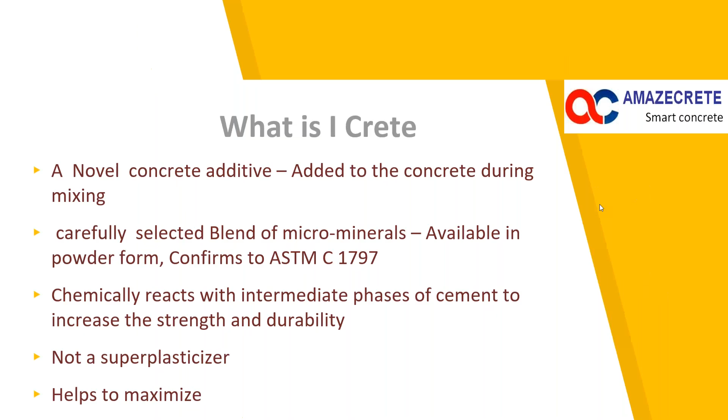iCrete is a novel additive which is added during concrete mixing. It is available in powder form. It is a carefully selected blend of microminerals, and it conforms to ASTM C1797. The product reacts with intermediate phases of cement to increase strength and durability, and it is a completely different product. It is not a super plasticizer, and it helps to increase the profitability and durability, and also helps to increase the use of supplementary cementitious materials. We'll come to that one later. Next slide.

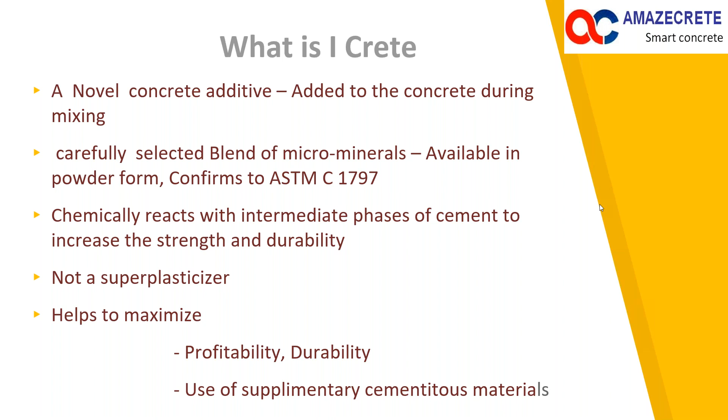So as we just talked about why we should use iCrete. iCrete brings great leverage for the concrete producer. He can optimize the mix by lowering the cement content, or he can increase the SCM loading.

For example, if we have OPC mixes, let's say a mix of OPC 400 kgs or 450 kgs at a particular dosage like 1.5 or 1.8 or 2%, we can reduce about 50 to 55 kgs per cubic meter. On the lower end of the dosage, if we have 0.8 or 0.7% dosage, we can reduce about 20 kgs per cubic meter. So the range is between 20 to 50 kgs, directly from OPC to OPC.

On the other hand, we can also reduce the cementitious content itself. For example, with an OPC plus GGBS mix, let's say 450 kgs total, we can reduce the total cementitious content from 450 to 400 kgs or 390 kgs. Sometimes we have got results of 75 kgs OPC plus GGBS total cementitious content reduced. Similarly, with an OPC PFA mix, say 400 kgs total, you can reduce the total cementitious content, or we can increase the SCM loading.

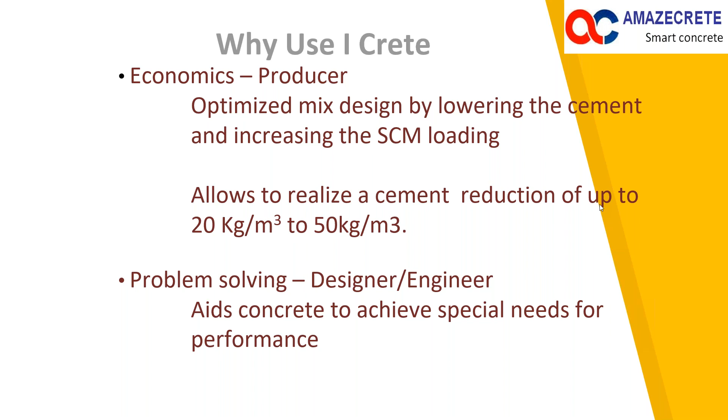So why we should use iCrete? The important point is durability to the owner. Even though the main purpose of this product is to optimize the mixes, which is very interesting and useful to any concrete producer, the beauty of the product, and why we call it a novel additive again and again, is that it not only reduces the cement content, cementitious content, or enhances SCM loading, but at the same time the durability is enhanced.

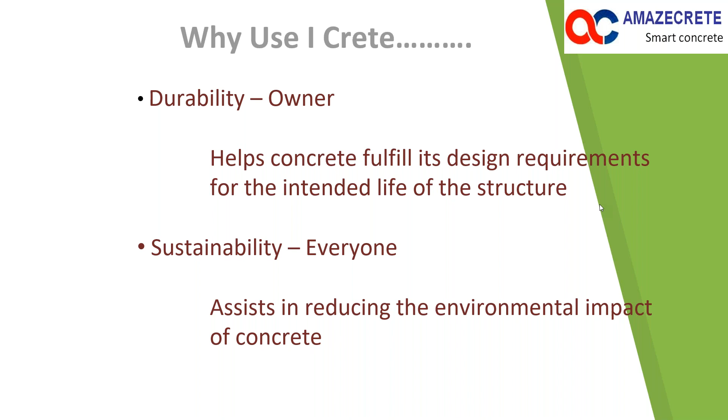And of course, when the cementitious content or OPC content goes down, the sustainability becomes better, the product becomes greener, and the environmental impact reduces. In that way, even the total carbon dioxide emissions, or the embedded carbon dioxide, and the other associated environmental factors are improved.

So when we talk about this product, the most interesting and important question everybody asks is how iCrete actually works. As I said, I'm like a student explaining in front of the teacher - I'm explaining this in front of Dr. Ramkumar.

Here's the point: it promotes dissolution of alumina and iron present in the supplementary cementitious materials and cement. We know that alumina and iron components are present in cement and cementitious systems, and iCrete works on these materials, accelerating the hydration of intermediate phases and increasing the rate of silicate reaction. Most importantly, it forms additional binding phases other than the calcium silicate hydrate gel normally formed in any cement hydration process. So it forms additional products other than calcium silicate hydrate gel, and that is how it works on a different level - that is why we call this a totally different technology.

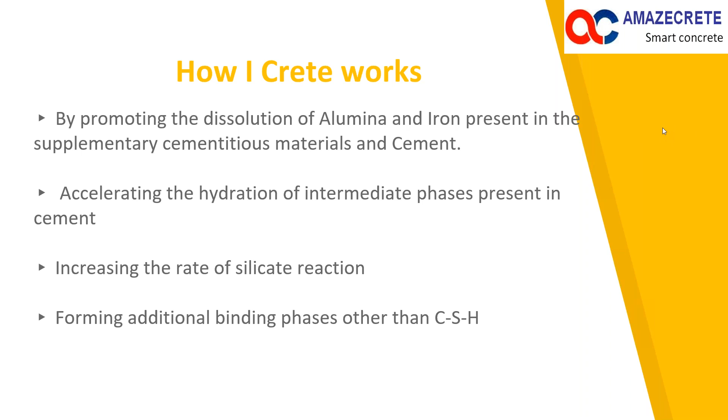So with iCrete, when additional binding phases are formed, it fills up the capillary pores and the pore size is reduced. That is the important work of iCrete. In combination with the alumina and iron present, it forms new binding phases other than calcium silicate hydrate gel and fills up the capillary pores, hence making the concrete denser, impermeable, and stronger.

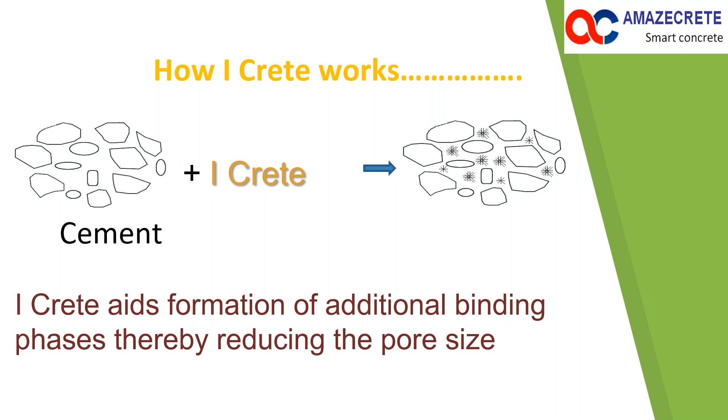Next. Next. So, madam, previous one.

So what is the difference between iCrete and superplasticizer? Any superplasticizer, we know, is based on SNF or PC based admixture. It does not react chemically with cement. It acts as a surfactant, increasing the distance between cement particles. It increases the flow or reduces the water content.

Whereas iCrete chemically reacts with the concrete, lowers the permeability of concrete, reduces the cement content, and increases SCM usage. Most importantly, there is no effect on the workability or rheology.

So whenever a pumpable mix or a concrete mix is produced using a superplasticizer, the workability and retention part, whether 1 hour, 2 hours, 3 hours, remains intact. ICrete doesn't interfere with the normal retention which happens with a superplasticizer or a superplasticizer-cum-retarder, and it also does not modify any rheological property.

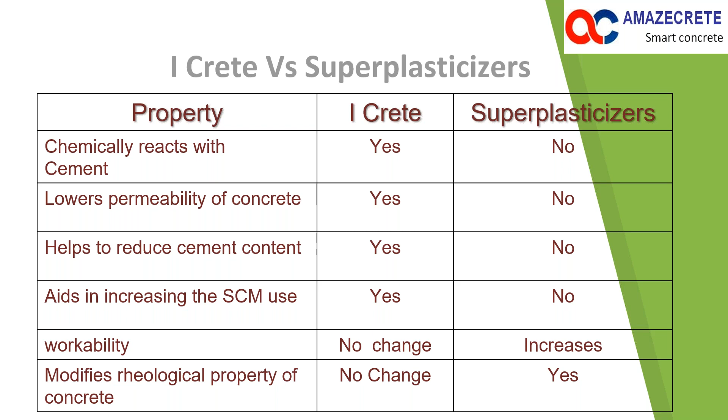That is one of the added advantages of using iCrete - it does not affect the workability in any way, keeps the workability intact, and in the same way you get better strength and better properties.

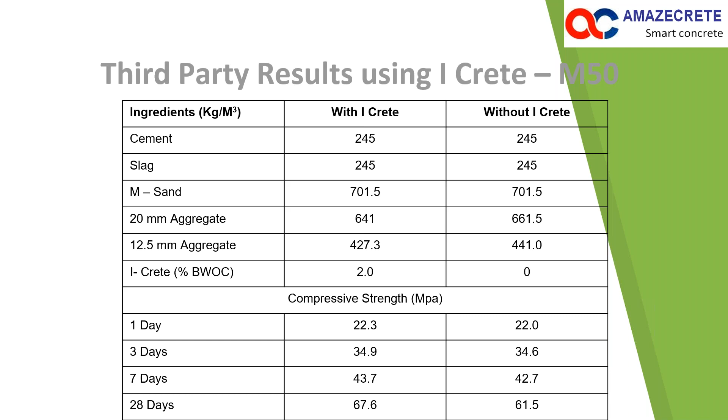Here again is a classical example where the permeability is reduced in a very big way by usage of iCrete. At the same mix, when 2% of iCrete is used, the percolation of water as measured per DIN 1048 has reduced from 13 mm to 4 mm, which is a tremendous reduction in permeability, leading to increased durability.

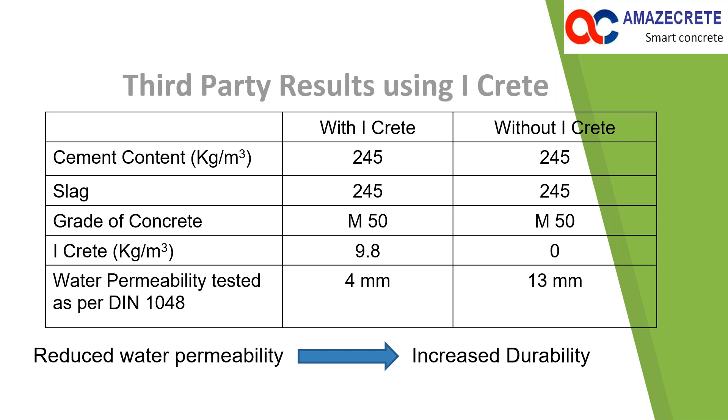So as per IS 2645, when the product is tested without iCrete, the percolation is 100% as measured. With iCrete, it is only 18% against the control when 2% by weight of cementitious content is used. So again, this shows the permeability is reduced in a very significant way.

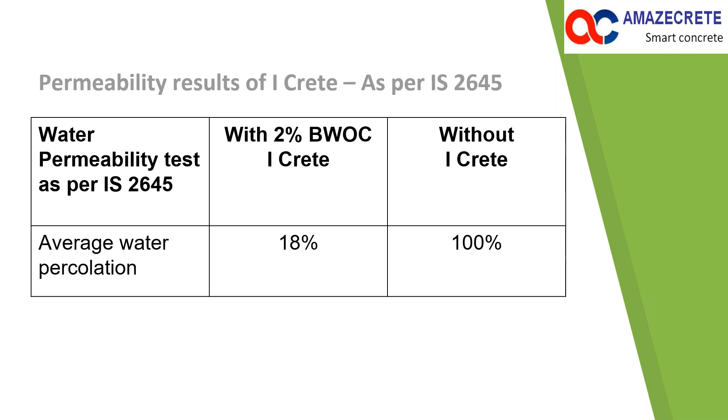Next one. So we talked about OPC GGBS mixes. Now this also works in a good way with fly ash mixes. Here we can see that when 220 kg OPC plus 100 kg fly ash is used, against that, when 0.7% iCrete is used with about 300 kg, the strengths are almost similar, 37.05 and 36.7.

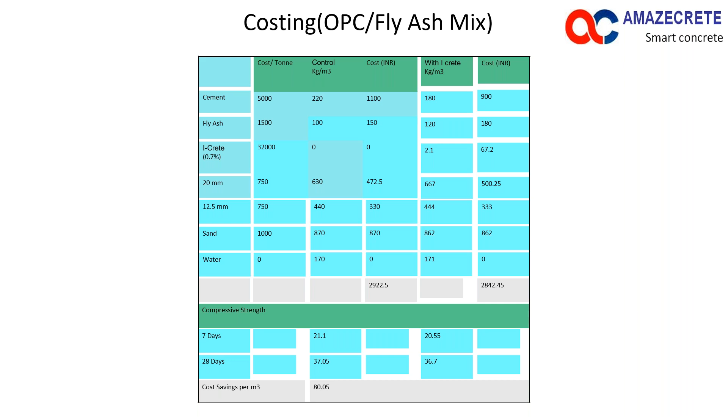So when we are talking about iCrete permeability test as per IS 2645, average percolation of water when 2% is used, it comes down to 18%, and without iCrete it becomes 100%. So there is a tremendous reduction in the permeability.

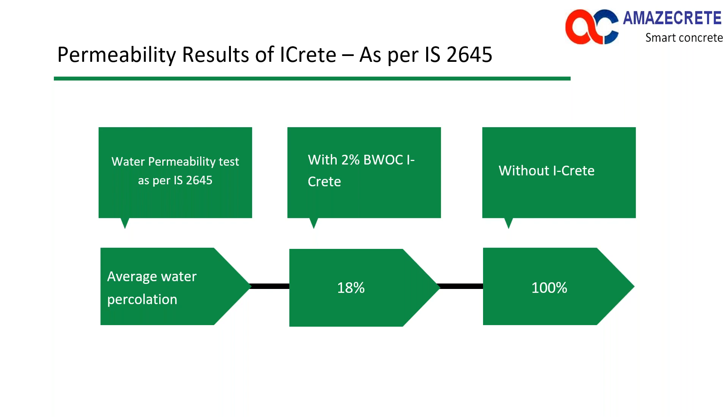As a summary, I can say iCrete is a novel additive which can be used to optimize the mixes. We can reduce OPC by 20 to 50 kgs per cubic meter, or sometimes even higher. We can reduce from an OPC GGBS mix to another OPC GGBS mix, reducing the cementitious content itself, whether it is OPC GGBS or OPC PFA, or we can keep the same cementitious content and increase the SCM content, increasing the GGBS content or the fly ash content.

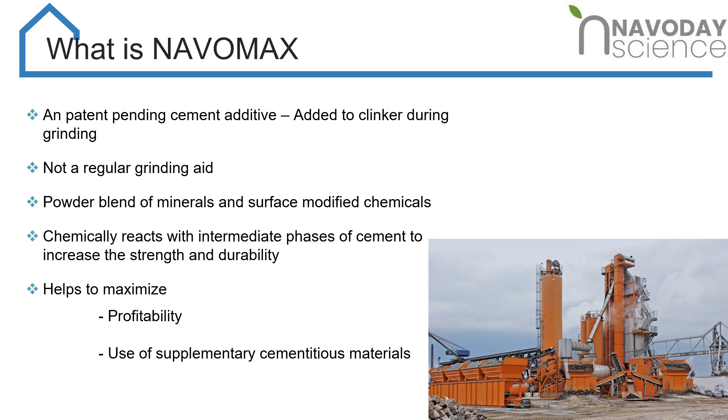So once again, as I told you, it's a powder-based additive. It reacts with the intermediate phases of the cement to increase the early strength and later strength. And I'll explain why, I mean what happens when you increase the SCM in your cement or concrete.

So all these supplementary cementitious materials, which are basically slag or fly ash, contain to the extent of 8 to 30% alumina. So when water is added to this system, because of the increase in pH, alumina dissolves and gets converted into aluminum hydroxide gels. And these aluminum hydroxide gels will start coating the silicate grains present in the cement, thereby not allowing the silicate to further react.

And this is one of the main reasons why you get decreased early strength when you increase your SCM content. Even though these aluminum hydroxides are metastable and over a period of time will go away, until that time it coats the silicate grains and doesn't allow the silicate to further react.

And what we have done here is we have added certain chemicals that will preferentially hold on to this alumina to get converted into aluminum hydroxide. The process is called chelation. Chelation preferentially holds on to the alumina by forming certain bonds, and it also supplies certain counter-reactive anions that will react with the alumina.

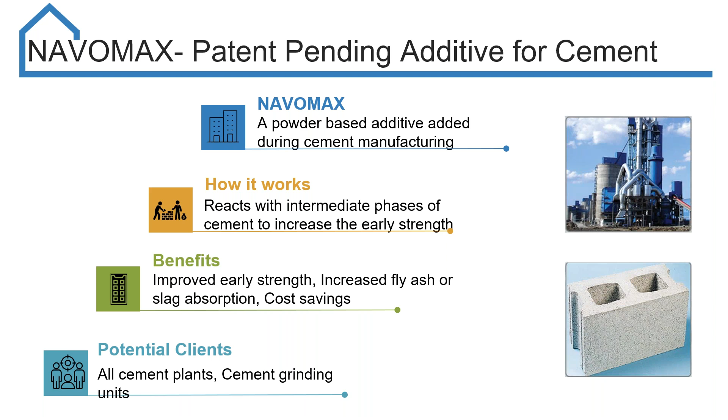So this is the principle which is very common with both iCrete and Navomax. The space between the CSH grains are filled with the reaction product of Navomax or iCrete in terms of concrete.

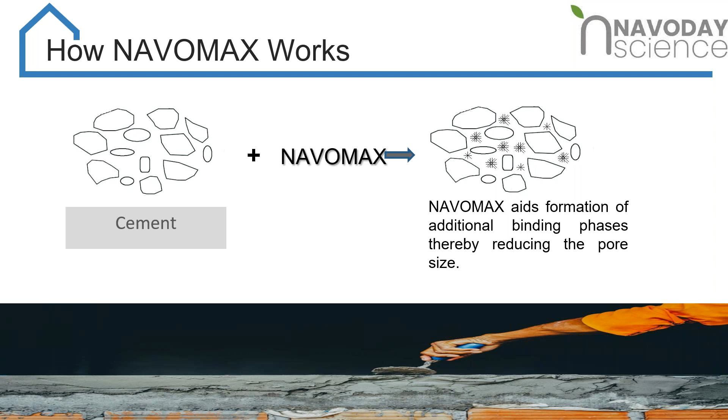So this is once again promoting the dissolution of alumina and iron present in the supplementary cementitious material, accelerating the hydration of the intermediate phases of the cement, and providing counter-reacting anions, increasing the rate of the silicate reaction, which I explained a little earlier, and then forming additional binding phases other than CSH.

When we say additional binding phases other than CSH, we have seen in the ternary diagram that calcium sulfoaluminate, hemicarboaluminate and carboaluminate are those additional binding phases that are formed when Navomax or iCrete is added to the system.

And you might have observed in the scanning electron microscopy, there are many minute crystals that are formed when iCrete is added, which fill the gaps between the grain sizes of the CSH, which is the main reason for the reduction in water permeability and increase in strength associated with the use of iCrete and Navomax.

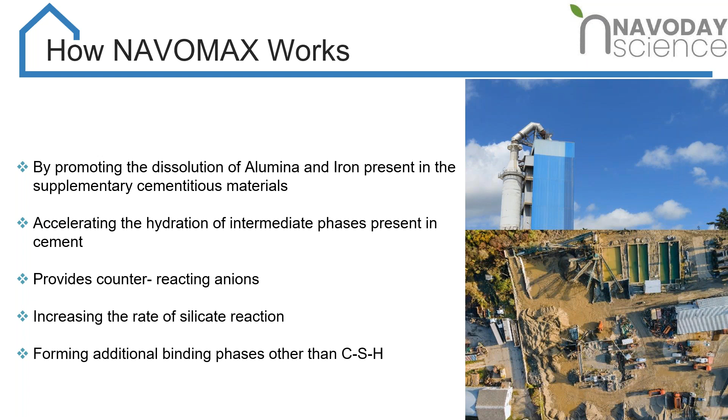So Navomax can be used for different needs depending upon the individual needs of cement plants. It can be used to decrease the clinker content, or to increase the fly ash in PPC and slag in PSC. Out of all three, people have mainly been using this to increase the fly ash and slag content, and it has also been used as a waterproofing additive to promote a new type of cement called waterproof cement in the cement industry.

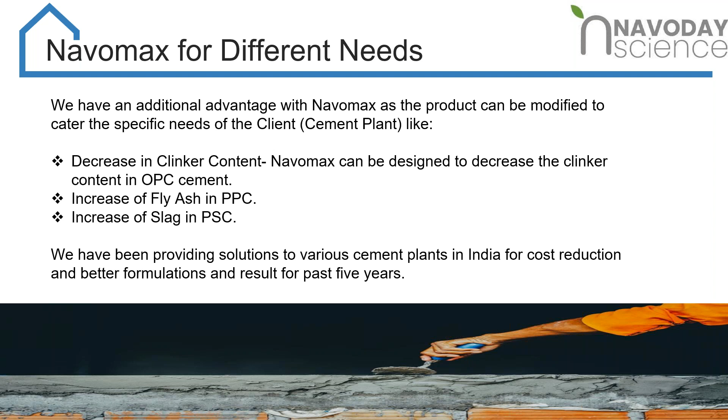When you compare Navomax to conventional grinding aids, it chemically reacts with the cement, whereas conventional grinding aids don't react with the cement. Conventional grinding aids increase the specific surface area of the cement, thereby increasing the initial rate of reaction. Navomax, on the other hand, chemically reacts with the cement to form additional binding phases, lowers the permeability of the cement, doesn't affect surface area, and aids in increasing SCM use.

These are typical results of Portland slag cement with and without Navomax used at 0.5%. We increased the percentage of slag from 46 to 50. Normally when you increase slag by 4%, your one-day strength goes down by another 2 to 3 MPa. But with the use of Navomax, even though we are slightly lower at one day, it's very comparable to the control. And looking at the 28-day strength, we are fairly, around 4 to 5% higher than the control.

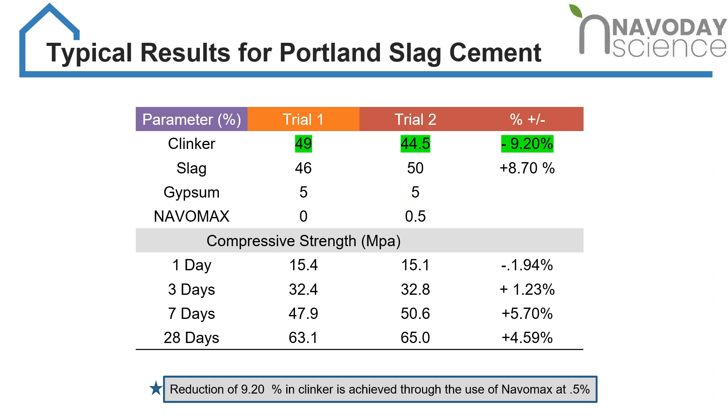This is once again trial results for Portland Pozzolana cement using Navomax at 0.6%. Same case here: even though the one-day strength is marginally lower compared to the control, the 28-day strength is also marginally higher. A reduction of 7.86% of clinker is achieved through the use of Navomax at 0.6%.

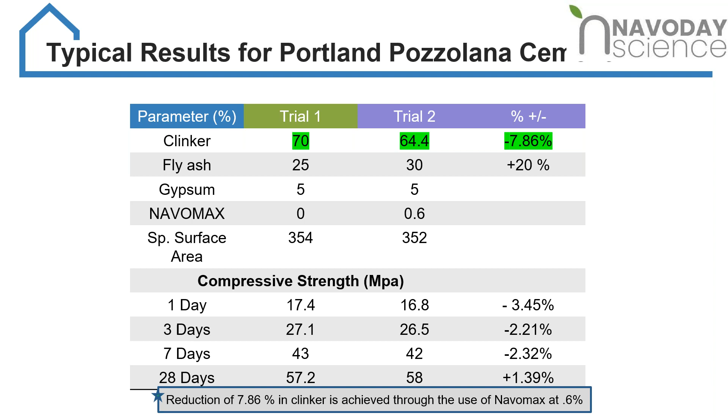This is with respect to ordinary Portland cement. The beauty of Navomax is it not only helps increase the SCM, but it also helps make the Portland cement better in terms of achieving its early strength and also its later strength. It reacts with the alumina and iron present even in the ordinary Portland cement to convert that into useful binding phases.

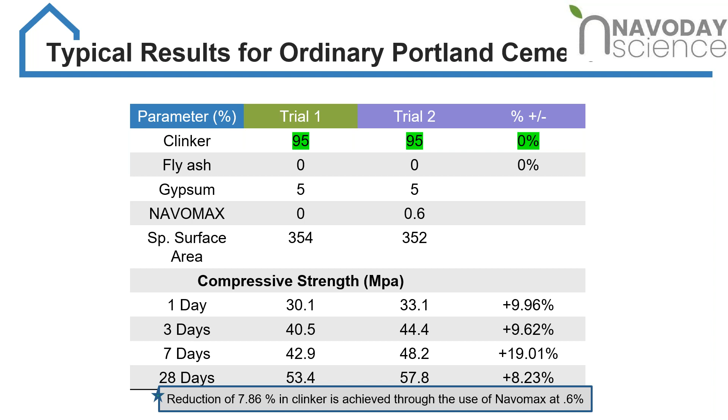The roadmap we normally follow with any cement plant is: once we receive the cement or clinker from the respective manufacturers, we analyze its physical and chemical properties, find out how much alumina is there, what the basicity and acidity are, and then do trials with different types of additives to formulate additives suitable for that particular cement clinker. This is not a one-solution-fits-all approach. Navomax is different for different cement manufacturers, and the same sample is sent for plant trial and starting from commercial supplies.

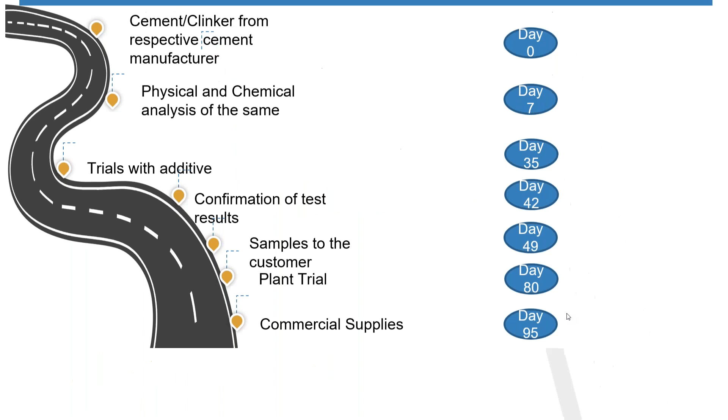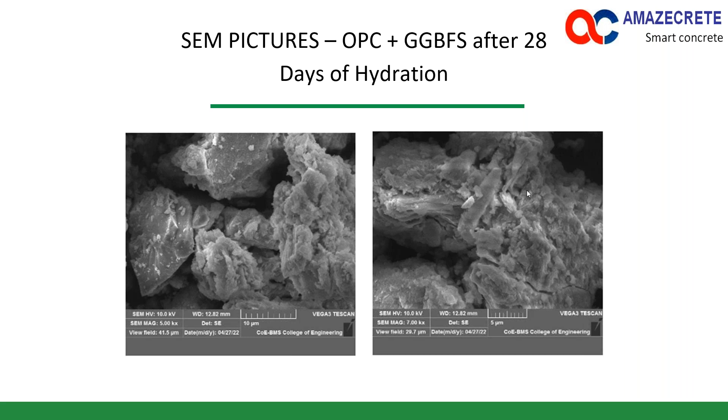But if you look at the next slide, madam - in between the grains, you see these crystals which have grown, and on the right side of the pictures, you can see that even very small crystals are deposited on the grains of the structure. This is how you differentiate between the one with iCrete and without iCrete. With iCrete, there is a growth of crystals that fills the pores, thereby not allowing water to enter and strengthening the structure.

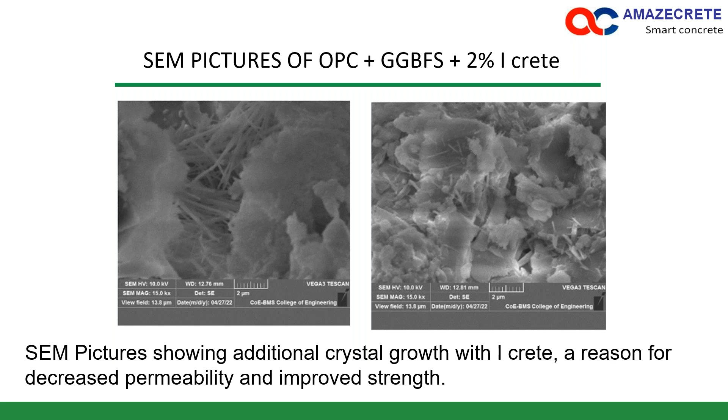Okay, next, thank you sir. Next question: is there any scope of doing research using iCrete? If so, how can I obtain this material?

Kaushik sir, you can probably get in touch with Mr. Kaushik. Am I audible? Okay, yes sir.

Next question: is this product compatible with super plasticizers? Asked by Vivek Singh.